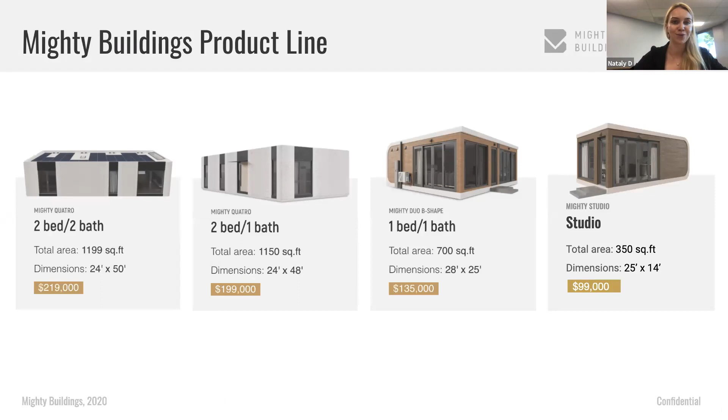And Stella will introduce Eano. Hello, my name is Stella, I'm the CEO and founder at innovation.com, now we switched the name to Eano.co. We are a one-stop solution for ADU and remodeling services.

In the past, like last year, we already have about 80 remodeling and ADU projects, and we have completed over 20 projects in 2019. We are doing a lot of projects in San Jose, like Fremont and San Mateo, all this area, they're very popular for ADU. A lot of people wanted to invest in this area for ADU projects. So Gene is our GC that's helping manage a lot of these ADU projects.

I invited him to this event. He will be answering a lot of the questions regarding technical aspects, like how you wanted to start, and also regarding the costing, like whether it's a good ROI for you to think of the ADU, if it's a good ROI option for you. So he will be answering those questions.

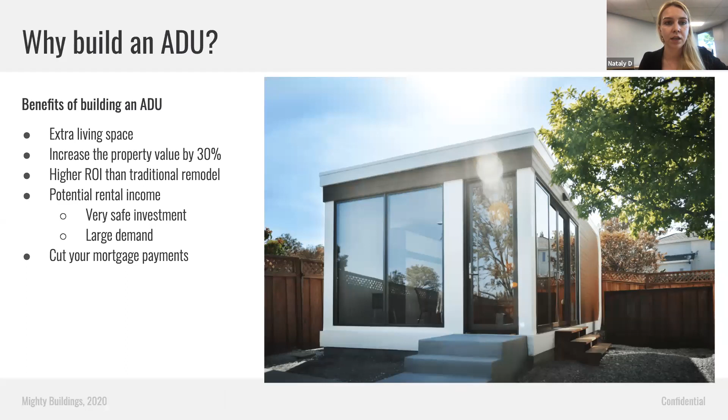Now to chat a little bit about the regulations and what made ADUs applicable and more popular in the past year. Zayn, if you could move to the next slide. Yeah, go ahead, I'll jump in on this.

There were some major law changes at the beginning of this year. Towards the end of last fall, Governor Newsom signed a number of different bills that opened up ADU regulations statewide. For the most part, they standardized ADU regulations in terms of setbacks, lot coverage requirements, and other important things. The most important being that any residential property now is allowed to have an ADU plus a converted space, a JADU, as well.

If you're on a multifamily property, you're now allowed at least 2 detached ADUs, as well as being able to convert up to 25% of the available space into additional units. Another very important new law this year was that if units were under 750 square feet, they did not include impact fees or lot coverage requirements, pretty much making it so if your unit could fit on your property and was under 750 square feet, it could go there no matter what.

One last law added was that HOAs have to allow ADUs in some shape or form. They may still be able to put in some design requirements or limitations in square footage, but before they were able to just directly tell you no, and now every residential property has to be allowed to have an ADU.

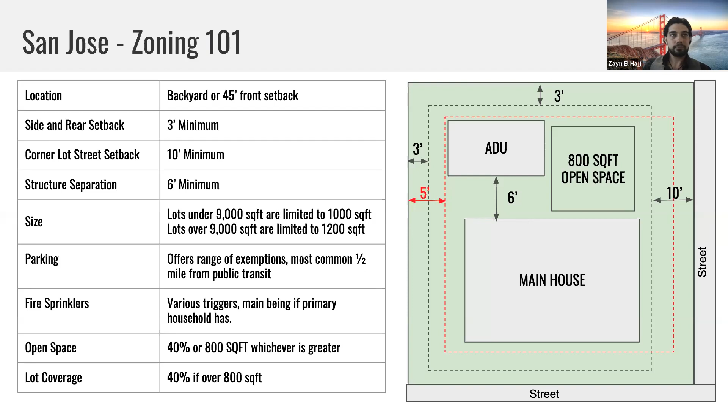Now, Jin's going to step in real quick and talk about traditional builds, what makes them good, as well as the challenges they face.

Hello, everyone. Compared to modular, traditional build gives you more flexibility on how you want to build your ADU. You're not limited on the size - you can choose 300, 400, 500, 600 square feet, etc. to build your ADU. You can customize the material to be a more high-end finish, or customize the floor plan, or choose cheaper material if you want to rent the property.

So the total turnaround time for building an ADU will be around 4 to 7 months. Some cities the inspection will come sooner, so you'll be able to turn around the ADU faster. But for the city of San Jose, usually they give you 1 week of time before the inspector comes out, so that will delay the transaction a little bit. So 4 to 7 months will be the turnaround time for a traditional ADU.

While working with a modular builder, a lot of that construction is happening off-site and can actually happen as permits are being finalized, making your on-site construction time usually less than a month. That being said, you're going through the same permitting phases, and the big trade-off is that you're not able to customize your unit as much. While we're able to customize finishing materials to an extent, a lot of your layouts and floor plans have to be within our pre-approved factory-built housing plan sets.

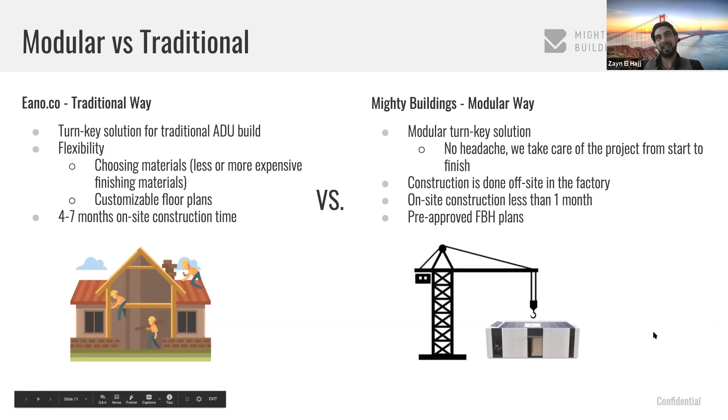But yeah, in either case, we're providing a turnkey solution. Now to go into a little bit about how estimates work for our units, we're going to go over one of our 700 square foot units, and we'll go into more case study specifically later on. In both cases, traditional or modular build, these initial costs for permits as well as getting your entitlement documents together are going to be fairly similar.

In some cases, you'll be able to find a cheaper architect to give you a cheaper design, so you might reduce your entitlement costs a little bit. But a permit for a 700 square foot building, whether modular or traditional, is going to be the same permit cost, as most permits are calculated by square footage nowadays.

The things that are going to vary are your foundation and utility costs, as that's all that happens on site with a modular build. The rest of your build is very set in place, and then your actual delivery - with modules, unfortunately, you need large equipment such as a crane to do your installation, so that ends up being a large additional cost to your project.

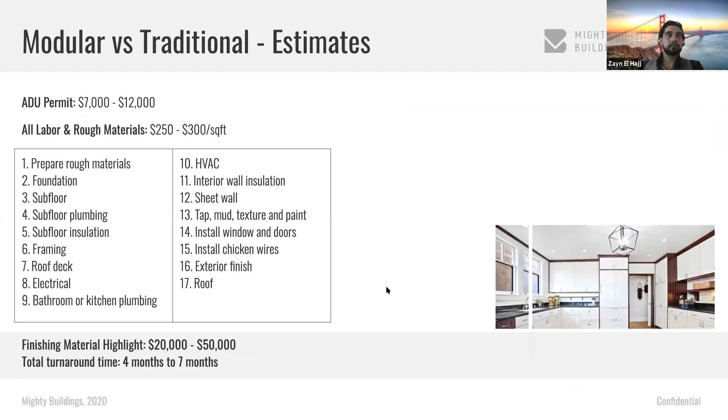Now compare this to traditional builds. For traditional build, you can simply separate it into 3 different parts. First is the permit part - you have to hire an architect to do your drawing and then get an engineer stamp before submitting to the city. That will cost you about $7,000 to $12,000 for the first part.

And then you get into building the actual ADU - rough material plus labor together runs from $250 to $300 per square foot. That's all including the work in the box, such as foundation, subfloor, plumbing, insulation, framing, roof deck, electrical, etc. So that's the second part.

The third part will be finish materials for the interior remodel. That's up to you to choose how you want the interior to look - it could be a little expensive or cheaper, running anywhere from $20,000 to $50,000, depending on what kind of material you want in the interior. Some people like high-end flooring and molding all around, which will increase your cost. And again, the turnaround time will be 4 to 7 months for the entire project.

You have to add the three parts together to give you a grand total, an idea of how much the total cost will be for doing this ADU. But as we are a one-stop solution, we can provide all three part services and get that done easily for you.

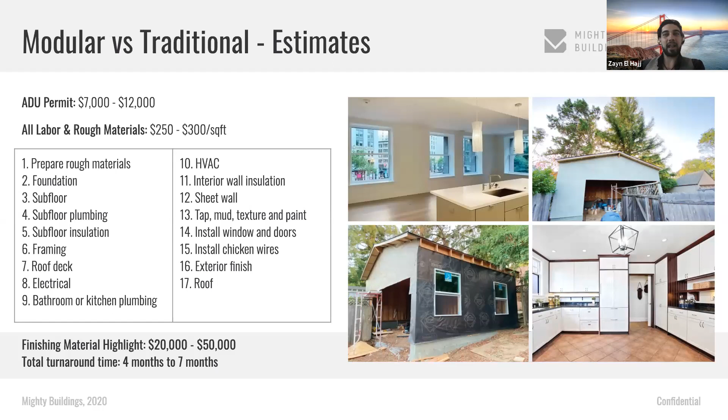It's actually a really good thing Stella brought that up. All the pricing we are providing today is based off Bay Area estimates. Areas that have cheaper or less expensive labor will have a lower cost for their foundation and utility trenching for our projects as well. In general, it's just a little cheaper to build in Southern California than in Northern California currently.

In both our solutions, as I mentioned earlier, we're using some form of either previously approved or pre-stamped plan to get permits faster through set layouts. Granted, if you were to do a custom build, this would be a little bit longer on the permitting end. But if you're able to use a previously approved plan set from Eano, or one of our factory built pre-approved, pre-stamped plans from Mighty Buildings, the permitting time gets heavily reduced. We end up doing all of your work.

One thing we forgot to mention at the beginning of the presentation is that Eano is one of our licensed installers, so they actually do the installations for our projects as well. We end up having a single person going through a single entity for a turnkey solution at the very end.

Now we're going to go over what happens after permits. I'm going to first talk about the things that are the same whether you're doing a traditional build versus a modular build. Then I'll show you what happens during the module installation, and then Jin will go over the different phases of construction that happen during traditional builds.

In either case, you're going to be building a structural foundation. With our units, we generally use slab on grade, but we're able to do any type of foundation, whether that's piers, stem wall with a crawl space, anything like that - it just changes the pricing depending on what type of foundation you're doing. The unique thing with module versus traditional build on a foundation is the connections - we embed metal plates to weld our units to the foundation. That's going to be the only unique thing in this stage for module.

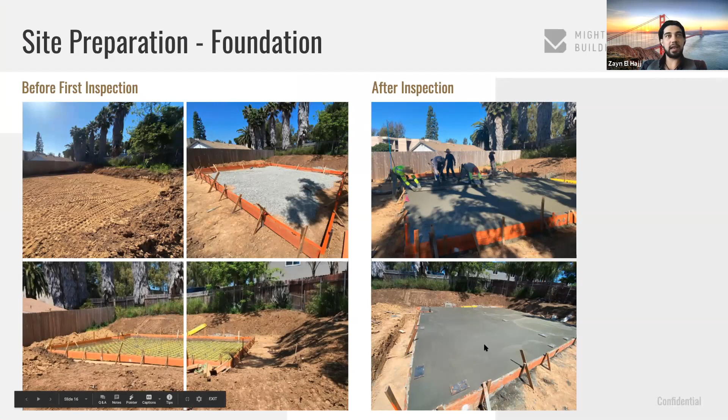The other thing that happens in both cases is trenching on your property to pull utility lines to connect to existing utilities. For instance, we are connecting to your sewer lateral or your electrical box, then pulling it to the unit and connecting to the unit. The connections to the unit are one of the final things that happen, but with the module, there's not really a whole lot of other steps, so it's easy to show here.

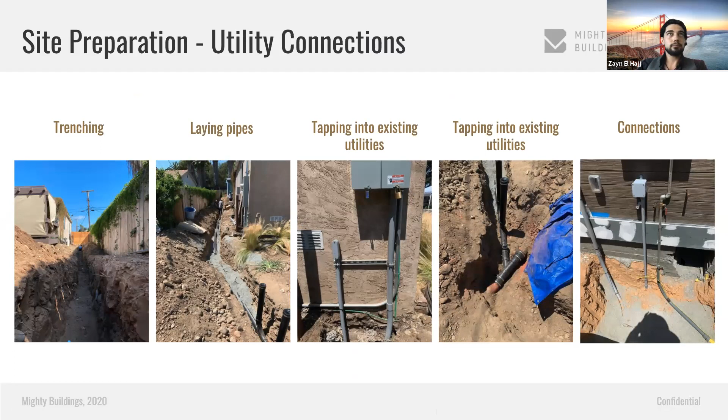So this is unique with a module build. As we're doing all these phases on your property, the unit's being built in our facility. Once it's ready, it gets transported on a lowboy semi-truck to your property, and then gets craned over the house into the backyard. This is what I was talking about earlier about the need for heavy equipment costs of a crane, which we need to actually pick up the unit and put it onto the foundation.

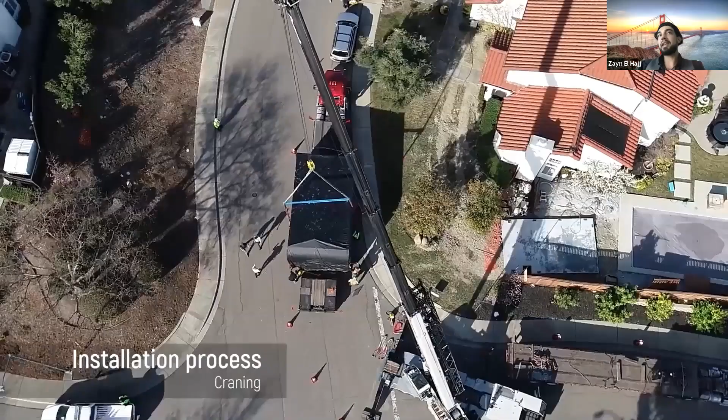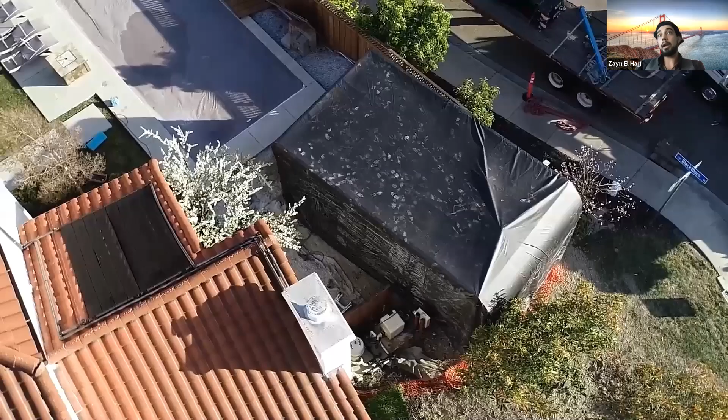In some cases, you'd be able to use something like a jack and lift, but with those you would need at least 16 feet of access, as our modules are 14 feet wide. So a lot of time it's just easier to use the crane for this installation. The cool thing is once it's installed, on your actual install date there's very minimal work left on the site. They just put in the steps to the unit, do the utility connections, and ideally it could happen in a single day. Generally it ends up taking about a week for installation of a studio unit.

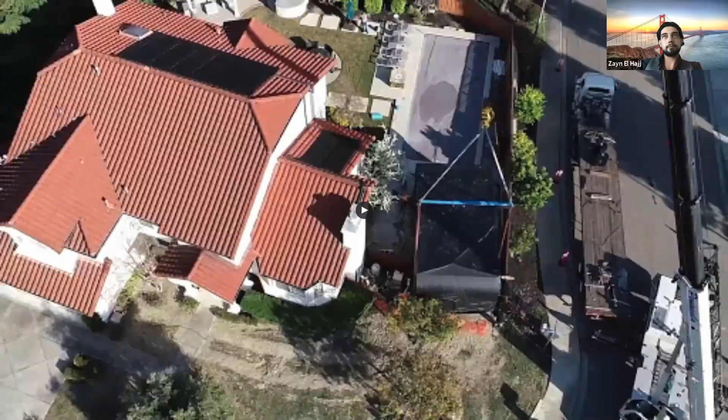Now you can compare this to traditional, which Jin was going to go over. Yeah, for traditional workflow, I'm just going to show you how to build from the ground.

So Modular was showing a type of foundation called concrete slab. Now I'm showing you the crawl space foundation. As you can see in picture one, we are lifting the house to create a space in the bottom so people can crawl down there to fix plumbing, to install electrical, whenever you want to do it in the bottom later on. If your plumbing has a problem later, we can also crawl down there for an easy repair. In picture two, we set up the framing and do some connection with the primary house.

In picture three, all the framing is up already, windows and doors installed already. We also install the wires, the lighting, the plumbing fixtures inside of the wall to get everything done before closing. Picture four will be insulation, picture five will be closing after everything is finished. The next step will be painting the wall to do a finish inside of the wall.

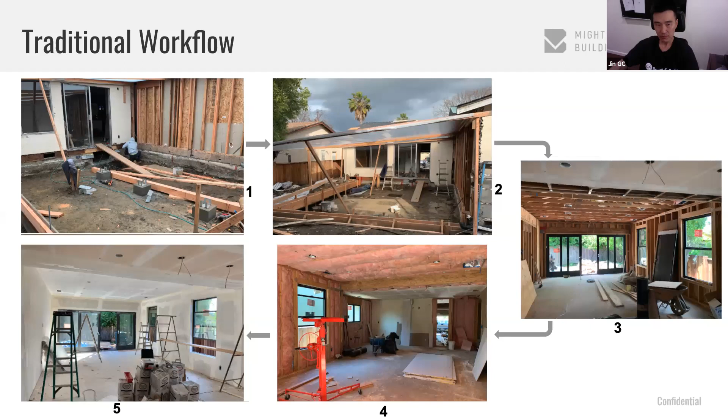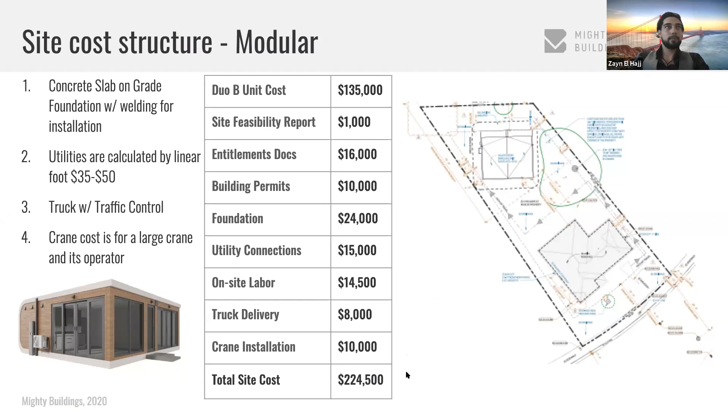Finally, the crane installation was about $10,000 for the crane. The crane doesn't generally get more expensive if you're doing more modules - it's usually just the initial cost to rent the crane itself. The total cost of this project ended up being about $225,000, just under. Now Jin's going to be going over one of their projects to give you a 500 square foot smaller custom build.

Yes, so we have a client actually contacting us for properties. They wanted to buy a property that's actually on the market right now, so we did a case study for this property. They have a low budget, so we came out with a plan with a 500 square foot addition in the backyard.

As you can see, this is the main house with the white box, and then the black box is where the actual ADU is gonna be happening. For this lot size, it's a 5,000 square feet lot size. We can be able to build the ADU up to 800 square feet, but I don't think you want to build to 800 square feet because anything past 750 will have an impact fee.

So that's why we gave them a design for a 500 square foot ADU in the backyard. This property is in the city of Fremont, so the setback rule is 5 feet away from the fence. Every city has a different setback rule - San Jose is 3 feet, we just mentioned that already. So we have to check the rules depending on which city you are in.

So for this typical property, 500 square feet detached ADU, the first part designing will be $6,500 for the architectural design. The second part is building the ADU - the material and labor together will be costing you $110,000 for building the ADU. The third part will be the interior remodel, and that will give you $25,000.